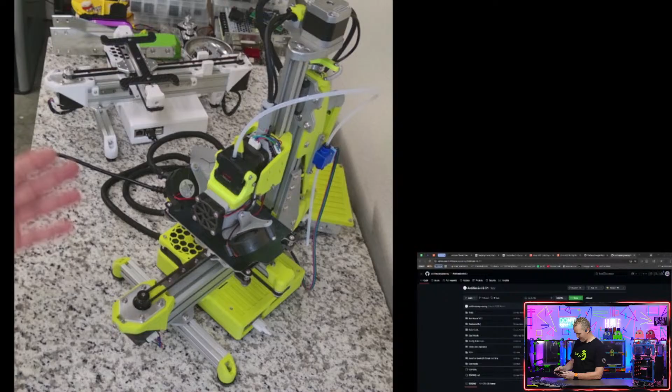It's not. I think while Jeremy's doing that, I'll show you what I'm working on over here. So if you guys remember, you caught the streams a couple months ago, I think back in July is when we last saw this. This is my Antithesis, my tiny little 3D printer. It's a 130 by 100 millimeter bed size, and the bed is Core XY, so the bed moves like this, and the tool head is static.

So I'm running the heaviest tool head that I have. This is the LGX extruder, full size, and I'm using that with a high flow hot end to print super fast and crazy. So I just updated the firmware on this. I haven't printed on it yet. I want to do some tuning and that kind of thing, and so that's what I plan to work on tonight. And then show off Antithesis number 2, this is my second one.

You're hearing an echo into this? It is a little weird with a moving bed popped away. It's a different way of doing it.

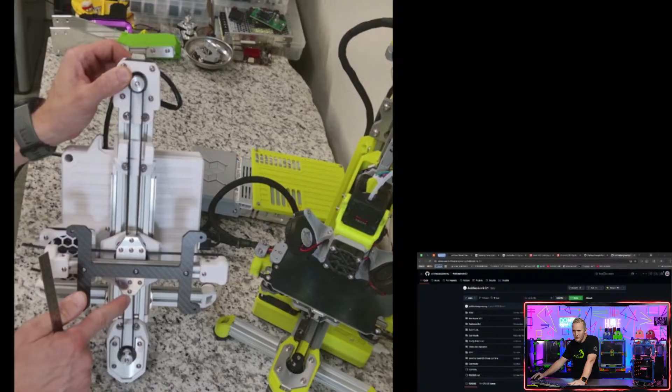So the cool thing is with the tool head removed and the bed removed, you can kind of see how the kinematics go on this guy. And it uses a carbon fiber plate, I want to say that's 6 mil, yeah, 6 millimeter carbon fiber plate. It's got CNC'd, I don't even know what you'd call it, joiner blocks I guess, and then a CNC tensioner, some other parts on it. And the belt is just one long belt that routes this way, and so the bed ends up moving like that.

Bird's eye view, yeah, so my camera is up here, a bird's eye kind of looking view down on the workspace. It's not going to let me get into my GitHub tonight either, it don't look like.

Coming to Printopia by chance? I am not, Josh, but I'll be there - me and Keela will be there. Yeah, I was sneezing there. Hey, thanks for the sub, appreciate you. But yeah, I won't be there, Lee Marie will be there, so team Jeremy and Keela will be there.

Does it break down for travel? Yeah, that's a good question, does that break down for travel at all? So this one was broken down for shipping, I just got this in the mail yesterday. This is from a different user on the Antithesis Discord, couldn't maintain the project, wanted to get rid of it. So I obliged, and now it's here. So we're back up to 25 printers now.

Back up to 25, you went down to what? And then you went from what down to what up to what now? Yeah, right, so I went from 20, I think 7 or 8, down to 21, and now we're back to 25. Climbing back up there. Yeah, trying not to do that, but this was too good of a deal to pass.

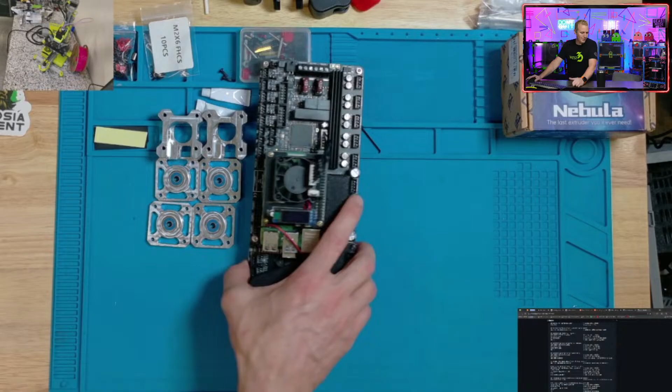Double T made these for me. This is for the inertia cube. These are the double shear brackets at the top of the inertia cube. These are the tensioners for the inertia cube. So I need to put all of that plus this inside of there, at some point, and then I'll be able to print with it. But yeah, I had to pick up another Orbiter 2 for that inertia because it takes the gears out of an Orbiter 2, which sadly I'm gonna have to pull the gears out of that to make it work.

But the other thing was the panel. I've been halted on that because the panel I went to put on it, it's not the right panel, like bottom panel. It was like a different one from Beta or something they sent me, and it didn't fit. So I opened the CAD and measured, sent it to Happy, and he cut me a panel, and from the CAD, it's not Happy's fault, it just doesn't fit. It's like a little bit off. I'm like, dude, I'm so... yeah, I could show you.

What does your bottom panel look like? Well, so you're talking like bottom of the machine panel or deck panel? Here's my bottom panel. I mean, I got mine over here, where the electronics mount is what I mean. You know, you mount your DIN rails on here. So yes, that. Okay, is this what you have?

Mine. Yeah, mine did not really work, but when I had Happy cut mine, it had, what do you want to call it, like holes around the edges. Does yours have holes around the edge? It's got grooves around, I mean, not holes. You talking about this?

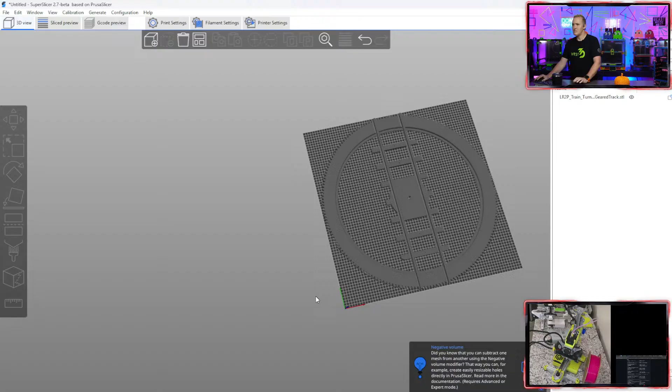Okay, so check this out - alright, we're gonna open a file here, right? We only need this one. Is that noise, hang on - why is that thing going off? Going a little bit crazy.

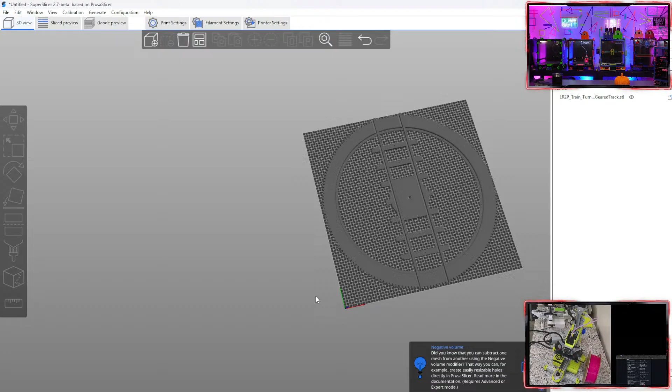Small sensor for small printer - yeah, Losink, you're exactly right. I do have a random BL Touch laying around somewhere, and I was going to throw that on here, but the BD sensor is working so much better, and I can get a quick bed level off of it too.

So check this out, this right here is a turntable - I'm printing several of these for a train thing. You see this open air area right here? So I'm going to slice this, and it's like trying to make a bridge across it. Watch it not do it now. A bridge across? Yeah, you'll see in just a second. Let me get it sliced.

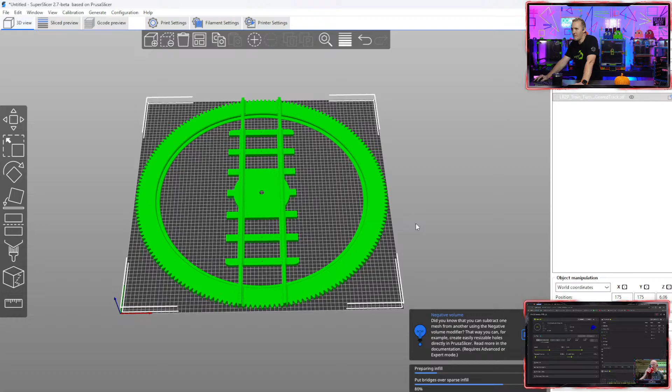It's strange - yeah, I'll be honest with you, man, I haven't used Super Slicer in a couple of years. No? Yeah, so Orca's what I end up using, obviously, but I just thought it was weird it was doing this, and I didn't see a setting in there that...

See that? Yeah, trying to bridge the whole thing - yeah, it's just one layer. See? Yeah, yeah, the trick. Try Orca - well, that's what I'm using, I just thought it was strange. I don't know what would cause it to do that. It's really weird, I'm sure there's a setting in there somewhere that's doing weird things. Yeah, I don't know. Well, that didn't come correctly - something funky about it, though.

Does it shift on that? How do you feel about sensorless homing? I don't like it. I don't like it either. That's just my personal preference. That's what this uses, yeah, I don't like it. How does it work?

How does sensorless homing work? I'll send it to you, Down Under Maker. I didn't know you was on the dev team for Super Slicer. I'll send you the G code just for out of my curiosity. No, I mean, how well does it work? Most of the time it's fine on this guy because it's pretty small. You're just homing X and Y.

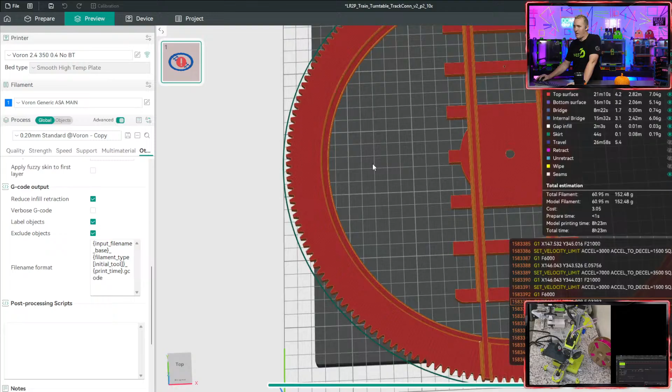This is a huge print, as you can see. When I say huge, this is on a 350 and it takes up most of my bed, and it's actually too much because this line right here, so I got to turn that off. These skirt loops - I usually do 2 skirt loops, don't really have to, but yeah, turn that thing off. That's a full 350? That's a 350, yeah, this right here.

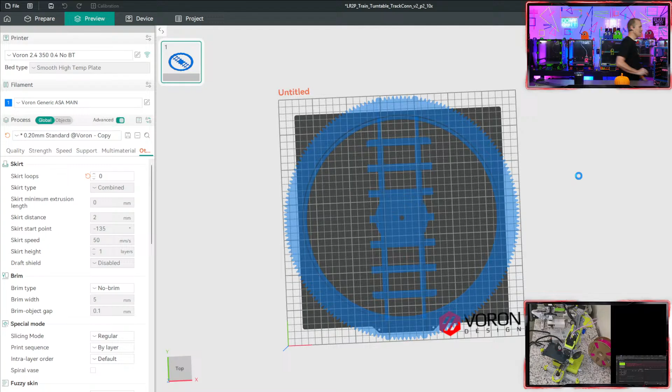Yeah, I saw you showing that on Saturday. Is that the same one? Yeah, it's the same thing, it's just not this piece. Obviously this is a different piece, but it's that whole gear piece right there. Yeah, I've got to put a handful of these things together.

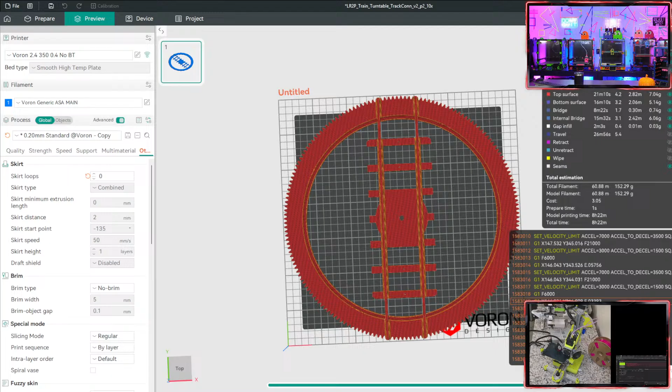Heck yeah, man, yeah, these are for Josh Polymaker. It's something that one of the items he sells on the site. He doesn't have a 350 printer currently, so I'm helping him out with that. Yeah, you should just give him one. Yeah, honestly I would. Yeah, he would trade me one of his or something if he's gonna build one. He's wanting to build a...

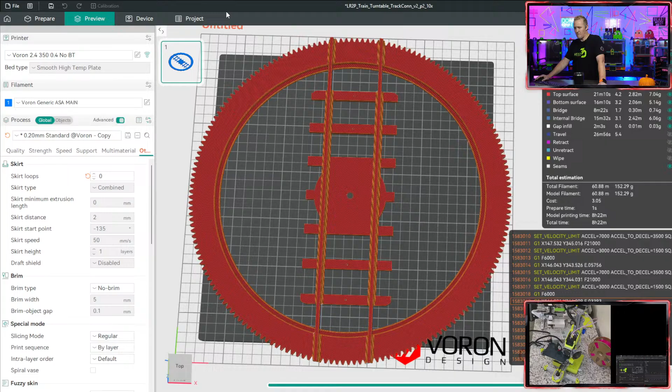We're gonna stream it here for too long, probably in the next, the end of the year or something. I think he said 350, 700 or something like that. I can't remember what the size - 700, 350, 700 maybe. He needs it really tall. Oh I believe, tall, gotcha. Yeah, I can't recall if that's exactly right, so quote me on that, but yeah. No, but he makes a lot of really large things, though.

I don't think I've ever printed anything over like 400 tall. I don't think I've printed any. I'm not that tall, I don't even know if I've printed anything 350. A Voron refrigerator probably. Kilo says it's a 450. Is it 450 by 350 by 450? How the hell does she know and I don't know? Why does she remember better than me?

Malmaker's in chat. There he goes. I thought it said 6 feet tall. No, maybe I'm getting confused. He said he built a 700. He's built some pretty tall printers. Yeah, he was showing me that at Rocky Mountain. Something like that, 450, 450, 350. Okay, that makes more sense.

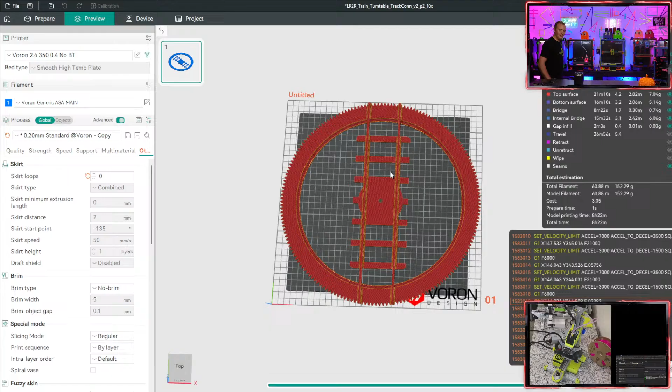That sounds about right. I want a pancake version of that, so 450 by 450 but only like 150 tall. Okay, that'd kind of look like a CNC, you know? It would. If you don't print a lot of tall stuff I could see that'd be fine. Most of the things I print are 150 or less. Yeah, that's how it is with me too.

That's... are we done yet? Liz, we are, we're just about to kick off a benchy on the refreshed Antithesis. Jeremy is working on some firmware configuration stuff.

8-foot tall printer, wow. I think with that I would just print like a full body scan.

It did not like... let's see, let's take a look at this. So I tried to send it and it said it doesn't like Nevermore, so I think I've got that called wrong in the config. Real quick though, I just want to clear that file out and keep it. Do you have a Nevermore on it? Yes, I think it's just named something different than what it called it. That's probably what I'm thinking it's called anyway, like Badass Fan or something like that. Yeah, air scrubber.

You know what, I actually don't run any Nevermores on any of my printers. Okay, so it's off, I don't have it enabled for whatever reason. I didn't turn it back on when I was messing with it the other day. That'll do the trick, won't it? Heater Fan, Nevermore - I think I just need to call it Nevermore, not Nevermore Fan, because that's going to mess it up too. Yeah, you want the naming to be right. I've got to take the fan off. We don't want to call it Heater Fan, Nevermore Fan.

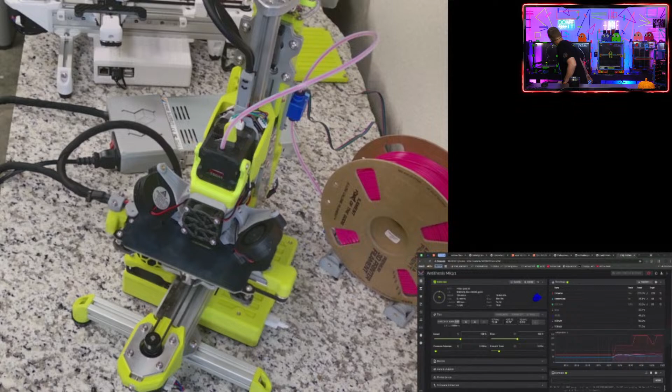See what we can manage. Let's go like this, and put that right in. Rocket, right in there. Hope I got enough filament on there actually. There's not a lot, that might be enough to finish that. We'll see.

FPS is a little shaky on stream in places, just saying. Steve, is that my stream or Jeremy's video feed that you're seeing craziness on? Yeah, I don't know.

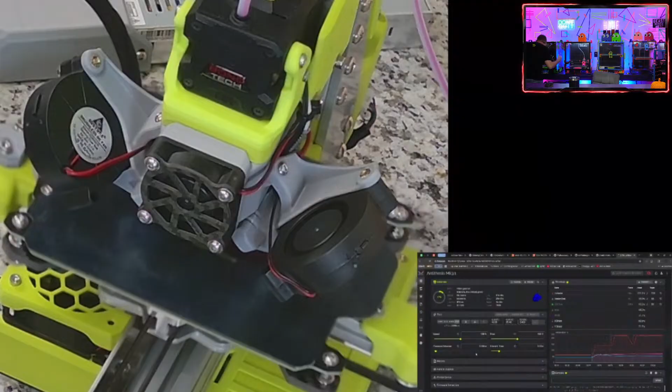Should name it after some kind of insect thing. Let's see what we're looking at. What?

I'm trying to catch up with chat a little bit here. The 28th, I'm pretty sure they'll be on the site.

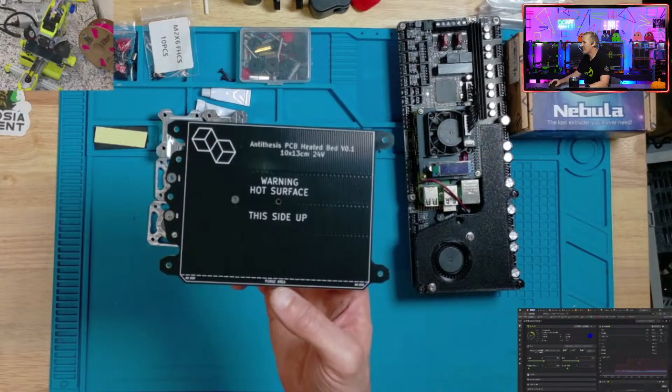It's just a PCB bed. So just 24 volt here, and you put a thermistor in this hole. Everything is labeled too, so you can't really mess it up. You put a thermistor in here, cover it with Kapton, just like you do with a Mark III Prusa build - it uses that style. Then there are 4 M3 screws that act as the bed corners. You have one center screw to sort of adjust any bow or anything like that, so that becomes your zero point. Then you can adjust your outside screws to get as flat as possible. I haven't done that part - mesh leveling takes care of it.